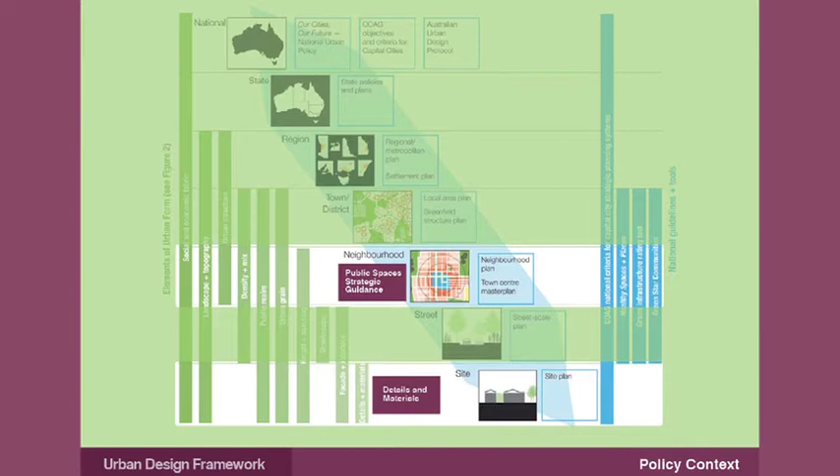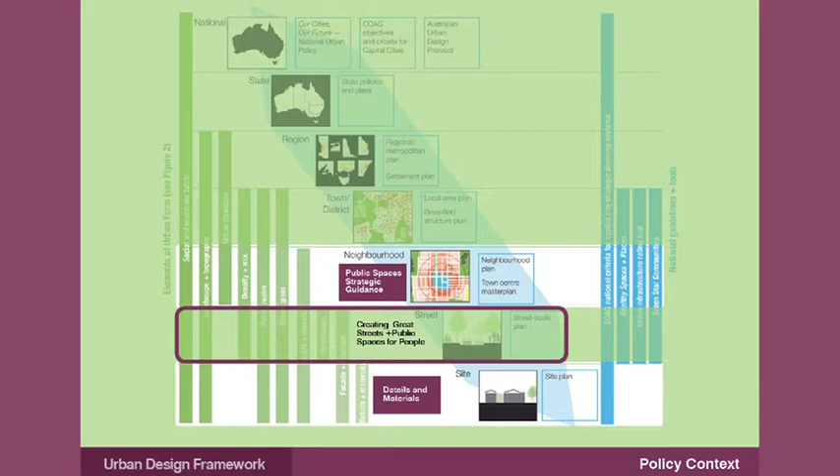What we're really saying about this project is we're having two parts to it. It's about setting a strategic vision for the future of the city and the streets, but then actually, how do we do it? So it's also about the details and materials, how we actually get long-term integrated change to occur to our streets and public spaces.

Council is also at the moment undertaking a placemaking strategy, engaging with the community and finding out what people want for their public spaces. So these two things work together so that we have a toolkit for the community to actually create the spaces that they want to have.

Just a bit of background of why we're doing it, and this starts to talk about a lot of the other sustainability factors we're looking at as well: there's just an excessive variety of elements and materials within the public realm of Adelaide. This is all of the seats that we've got, all of the spare parts, all of the things that we have to maintain and look after.

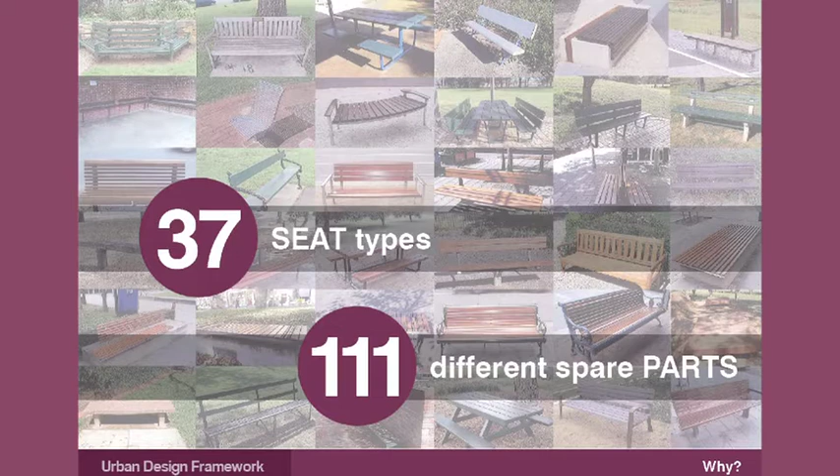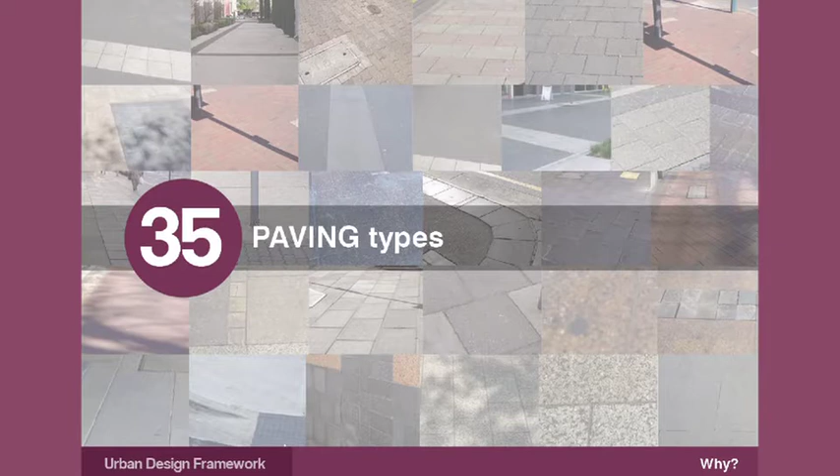So how do we make it easier for our depot and maintenance crews to actually repair and fix things? There's just all of the different types of bollards, all the different types of pavers. What does that mean for council in terms of sustainability, maintenance, long-term financial planning, procurement, all of those kinds of things, where we start to have inconsistent approaches to designing our public spaces?

It's always with the best intent, but if you've got 35 different types of paving, you've got to have 35 different types of stockpiles, 111 different piles of different parts. And what starts to happen is you start to have this erosion of the quality of the public realm.

So when a new bike rack wants to get put in, it's kind of like, oh, we'll put it in and we'll get the concrete to match, and we'll colour it and it'll look okay, and it just leads on to an erosion of the quality of the public spaces. And high quality public spaces attract people and make people want to use them, so we're just wanting to improve the quality.

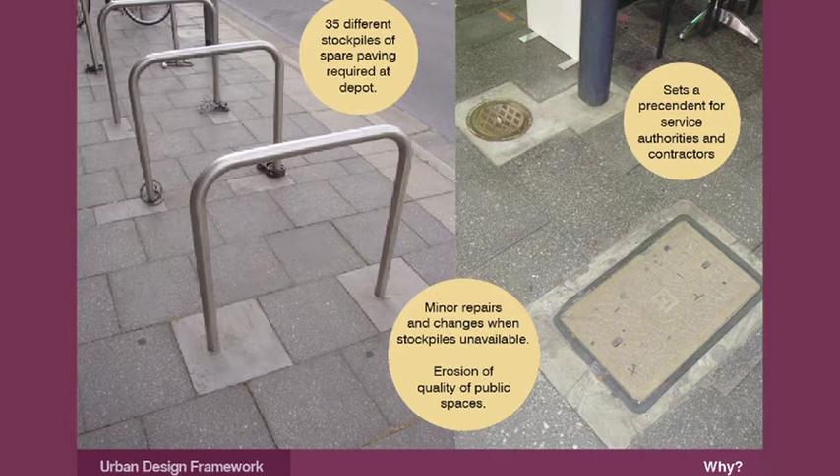There's a big risk aversion. So everything's about, oh, what if a car drove around that corner and took everyone out sitting there? It's kind of like, well, we should be looking at designing the spaces that actually calm traffic and create environments that give people shared responsibility.

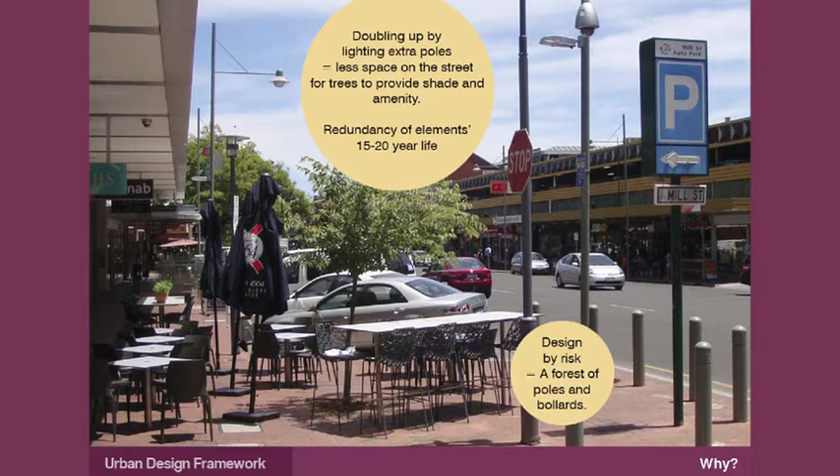So it just leads to these things where you have a set of bollards here, then a pole for your CCTV camera, then a pole for parking, and then another pole. So how do we start to consolidate all of these things and design places for people?

Elements are used inconsistently, so it's about the look and feel of the city as well. It's about Adelaide as a place that visitors come to. So how do we work on these things? And then we need to consider sustainability, including whole of life costs.

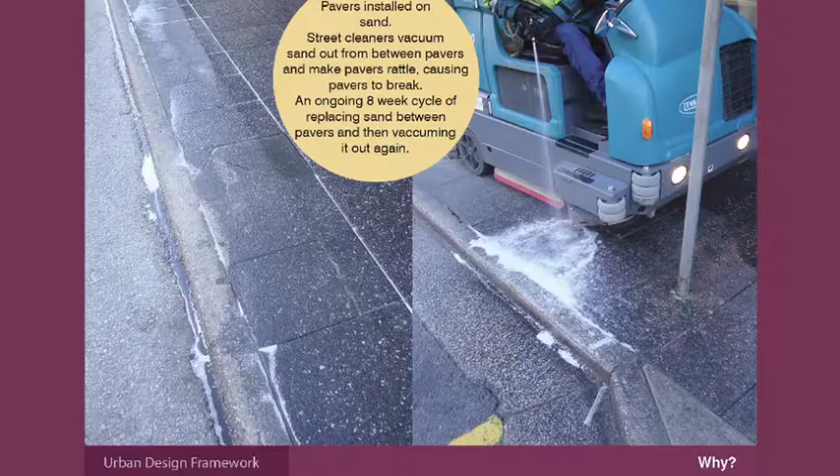This is an example of Hindley Street, one of the busiest streets in the city. Every Friday night, everyone goes out, has a good time. They have a few too many drinks, have a kebab and drop it on the ground. Then the depot's got to come and clean that up. Come Sunday or Monday morning, they're down there with street cleaners, scrubbing, getting all the detergent in there, blowing it into the pavers to clean everything out.

But we actually install them on a sand base. So what happens is through time, it's an 8-week cycle: they go down, scrub, blow out all the sand, the pavers start to rattle, people start tripping and falling over, and everyone goes 'what are you doing?' So then the masons come back and relay it all with sand to get it working right.

And then the cycle starts again. So how do we look at saying that in the long run, maybe we need to build something of a higher quality that takes those activities, so you're not having this ongoing maintenance occurring all the time.

We don't have a palette of materials or approaches for the parkland, so this comes down to equity - how do people, like a parent with a pram or a person with a mobility aid, actually interact with and enjoy the parkland? So it's about improving the quality of our spaces and how they work.

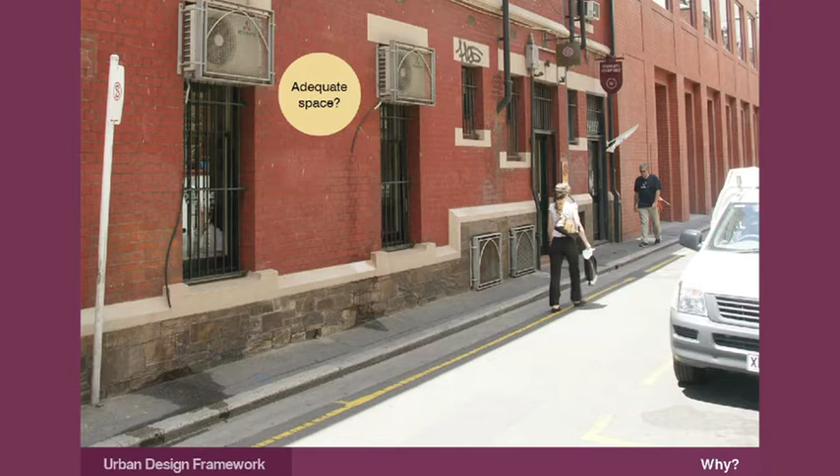And then we need to look at future-proofing the city. We know all of the work that Hassan's been talking about - how do we start to prepare for that in 20 years' time, when trees and all of those things take time to grow, and how do we get the right conditions for them to grow?

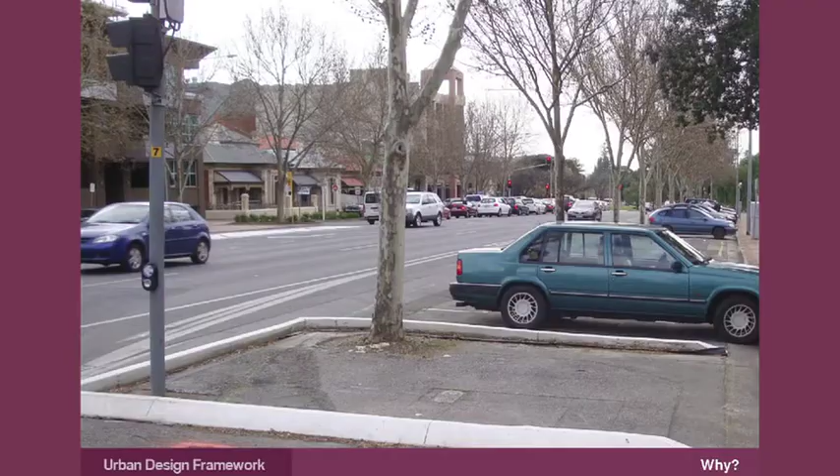So there's lots of things that occur at the moment, and there's lots of contested space in the public realm - it's almost like an iceberg. Once you cut the surface, underneath there's all the services, all the service authorities, and they have requirements saying you can't plant a tree here, you can't plant a tree there. How do we actually start to work with them to better get plants into the ground to provide long-term value for the city?

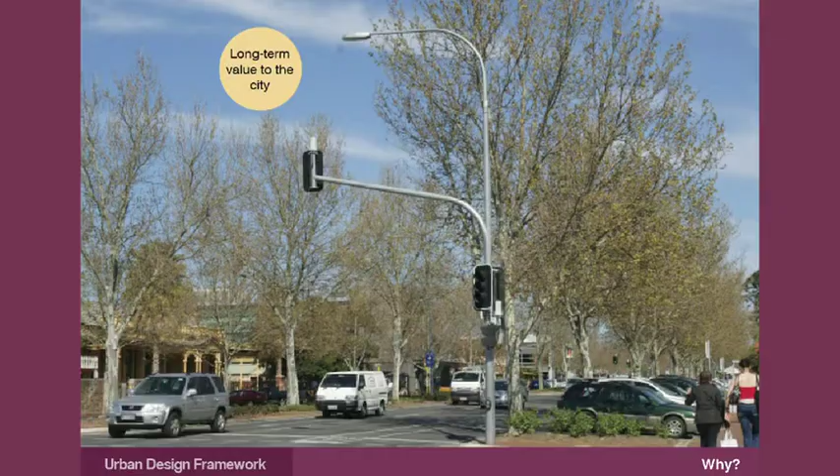This is the only asset class in the city that actually increases in value, where everything else depreciates. There's studies showing that in a street with trees, property prices go up, people use them more. So how do we start to transition our streets towards this?

Some of the objectives and components are really to have a strategic guide for the city - building on the strengths, confirming a clear and consistent approach to public spaces which incorporate urban design and sustainability principles, and providing a set of documents for developers and council officers.

So this is all about how council does things. Council has a lot of asset classes. Generally what occurs is if a footpath needs to be resurfaced, people come in and resurface the footpath, but then 3 years later the lighting might need to be replaced.

So they come and dig up all the footpath, trench it again, and put in the lighting. Then a few years later it's like, oh, we want to put trees in here. They dig it all up again and do it again. So how do we start to combine all of this stuff so we can actually have everything undertaken at the same time, considering everything at once?

So it's more an integrated approach. If we have consistent details, it becomes easier. It's kind of the toolkit you can use to build the city. We like to use the analogy that we're on the Monopoly board, but we always seem to hit jail and go back to the start. How do we collect our $200 and get past that?

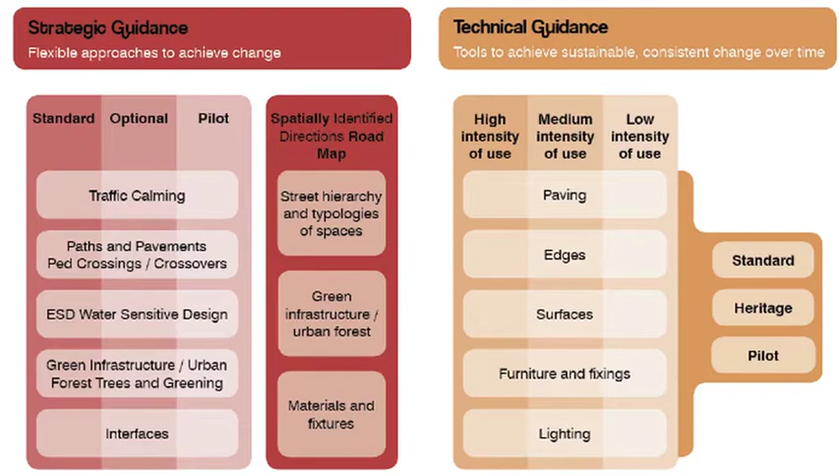And then the whole process fits into the process of renewal. Really this is a toolkit and a guide for us to work with the community to build the places that people want. They fit into the process of renewal with third parties, businesses, the public, other stakeholders. We have a bit of a plan for where we want to be in the future.

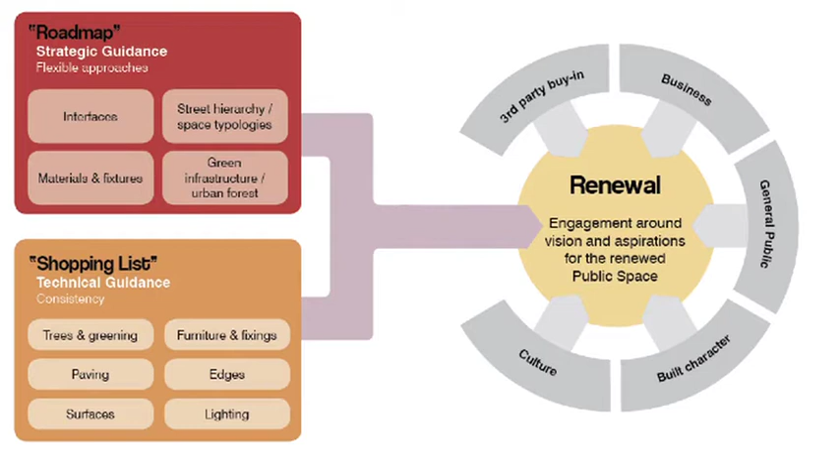As part of this presentation to council, we gave a few case studies of places where this has occurred before. Lyon in France was an example we provided, to really start the conversation that this is a long-term plan - a 30-year plan for how we improve the public spaces, doing it bit by bit to have a better city.

This process started in 1989 in Lyon, initiated by the government because they had lots of social inequality concerns and issues. Their key platform and strategy was saying that public space is common ground for everyone - so if you design good public spaces, it's going to help with all of these things.

So what they did was come up with a high-level plan. They had a green plan for greening the city, a blue plan for how they're going to deal with water and integrate it into the urban realm, a city plan, and a lighting plan as well. These were the strategic guides.

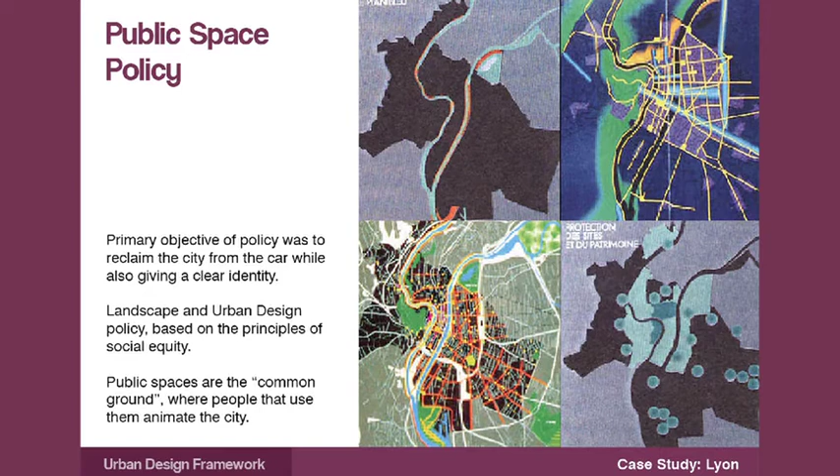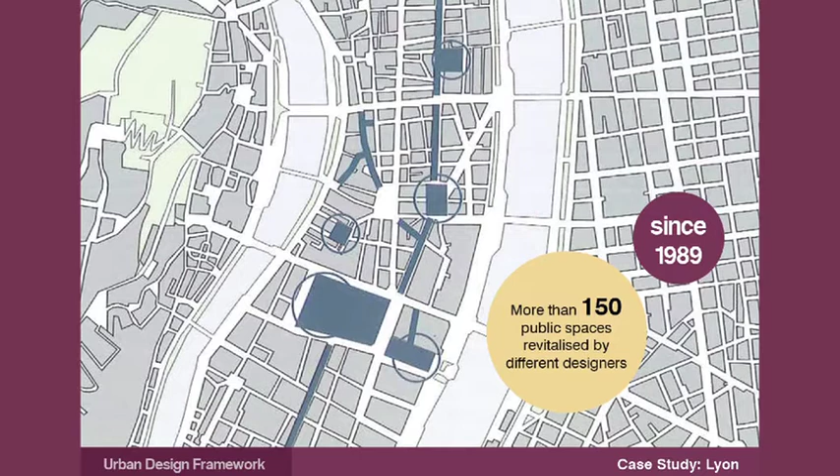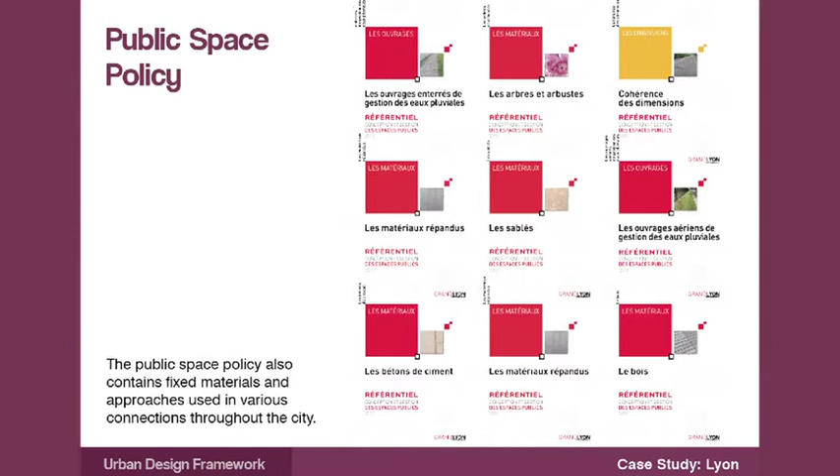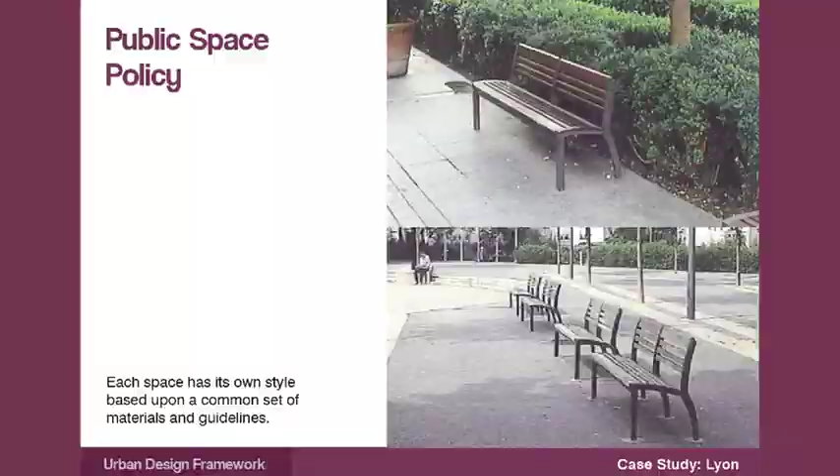Since 1989, there's been more than 150 public spaces undertaken and revitalised by different designers, landscape architects, urban designers, and artists. But what they had was a palette to work with - you could be creative and design these spaces, but using this kind of palette. All different permutations of spaces were created, but they used the same palette, which helped the local government and authority with maintaining and upkeeping it all.

This is one of the components of the urban design framework that we've had endorsed by council. So this is really what we're talking about: the streets of the city. Adelaide's blessed by having the parklands around there, but it's the streets that we're looking at that are the public spaces.

What we've undertaken is a classification of the streets based on the activities we know are scheduled to occur there and what's going to happen in the future. We've started to define different zones, different areas. This is where it all occurs in the city. But then there are going to be changes in the future, an increase in development, more urban living, inner city urban living. And then there are parts of the city that aren't really going to change much - they're heritage listed.

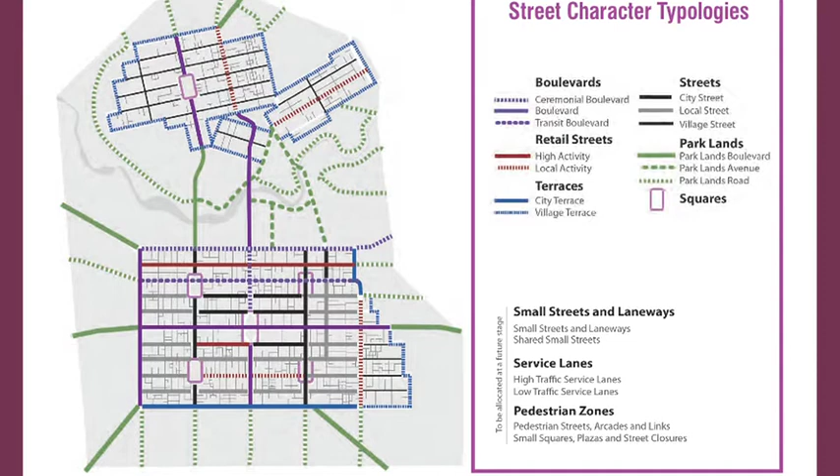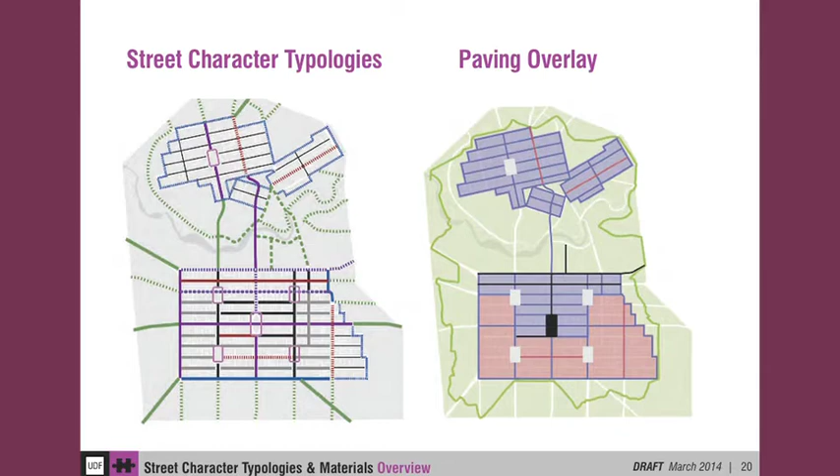So we've worked on providing an overlay to that. There are all these layers in the urban design framework, and one is a paving overlay. Previously there wasn't a palette of materials agreed upon by everyone for use in the city, and that's what led to the 35 different paving types. We've now been able to get council to agree on a range of materials.

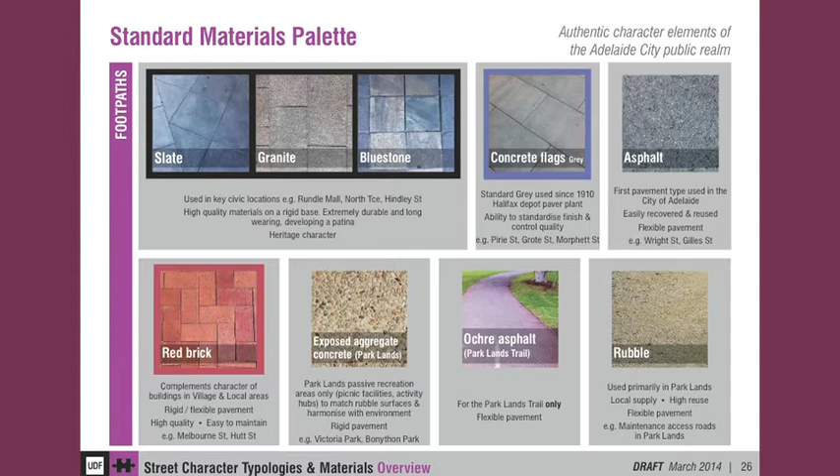The materials we've chosen, we've been careful to make sure they all have the ability to be sourced locally. We're looking at using Mintaro slate from the Mintaro quarries for the really prestige, high quality streets, granite, which was used on North Terrace and quarried from a granite quarry out in Outback SA, and Kanmantoo bluestone - all locally sourced materials. We're also using red brick, a lot of which are Littlehampton pavers from the Littlehampton quarry, and then concrete flags.

We've made a specific decision to go with the light grey concrete flags we use at the moment, because of the urban heat island effect and absorption of heat through darker surfaces. We're using asphalt as well, a very recyclable material, easy to reuse and recycle. And we've looked at using rubble and other materials for the parklands.

At the same time, we've said there's a standard we'll use, but we know things will change in the future. How do we know, and have a process to be able to evaluate materials we want to use in the future that we know we're going to need? And how do we assess them properly?

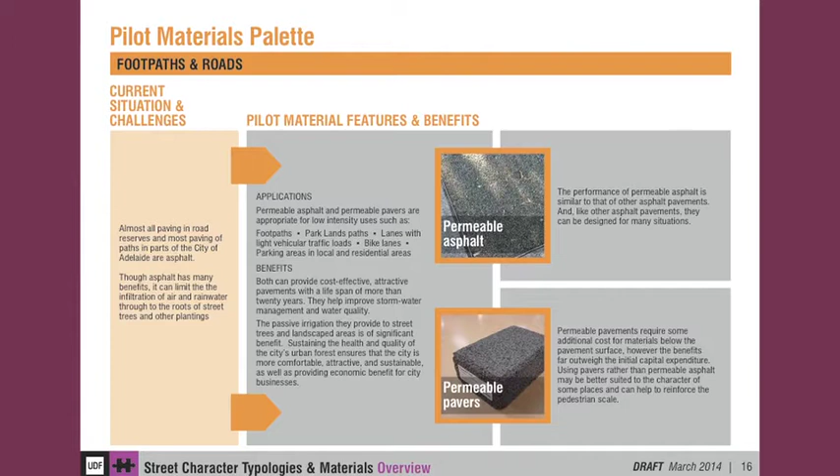These are a couple of the key ones we really want to start using: permeable pavers and permeable asphalt in our footpaths. How do we get water back into our streets rather than down gutters and pipes and out to Gulf St Vincent? These are some of the first things we're going to trial - permeable asphalt in some areas where you don't get high frequency of vehicles, maybe in some of our parking bays. In streets where there are trees, we'll get the water into the ground to irrigate the trees. And we're looking at permeable pavers as well.

That's backed up by a process where we trial it and do a proper holistic assessment. What are the issues with procurement? Where does it come from? How are we going to build it? What's the construction methodology? What are the maintenance requirements - going back to Hindley Street, is it going to be easy to maintain? And then what's the disposal of it?

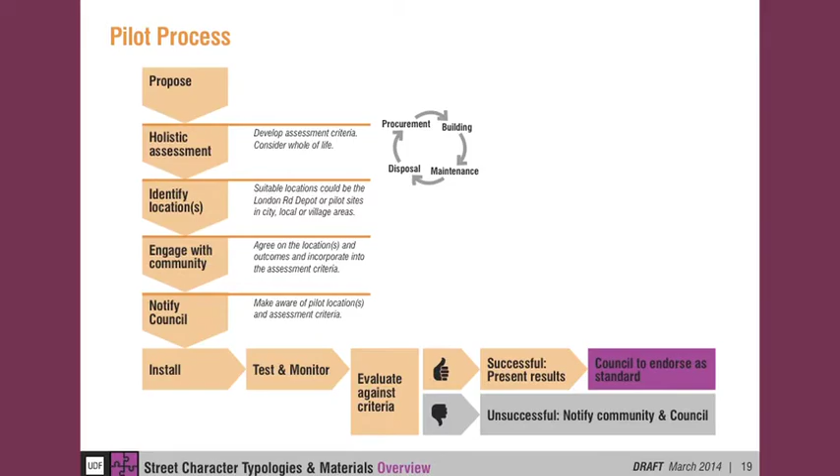Then we'll identify suitable locations for it, engage with the community saying this is what we're looking to do - what do you think about it, what do you think criteria should be assessed as well. Go and notify council, install it, test it and monitor it, then evaluate it against the criteria so we actually know what we're wanting to measure and get out of it. If it's successful, we'll put it up to council to be endorsed as a standard. If it's not, it's back to the drawing board - we'll keep trying.

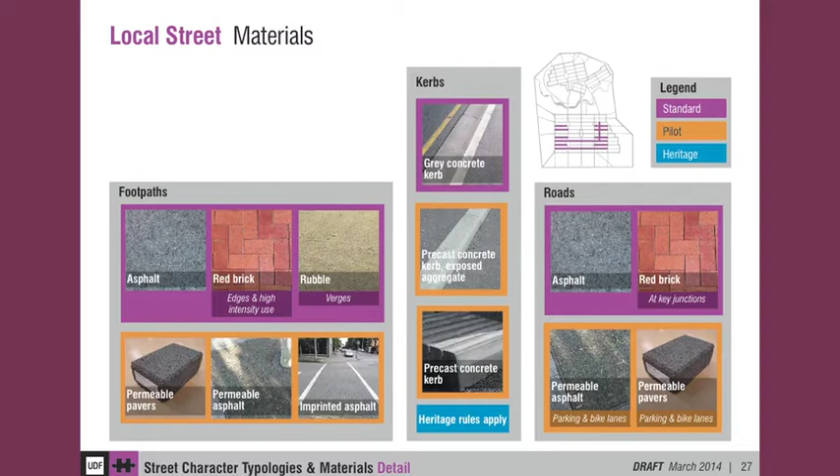And then what we've done is we've started to specify materials for streets. So all of the different types of streets that we had before, we've started to identify a palette for each of those types of streets. You can start to see here that we're wanting to look at using permeable pavements, certain types of paving. And these all relate to the character of Adelaide as well, reflecting the built character of the city. There's lots of red brick in the buildings, lots of slate.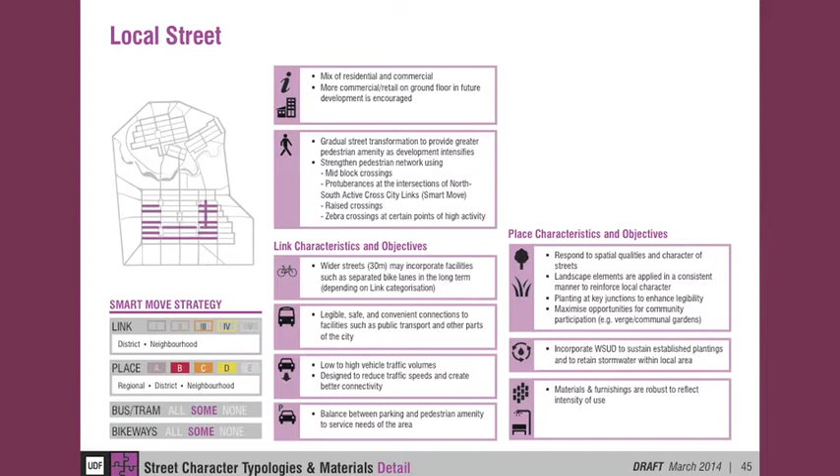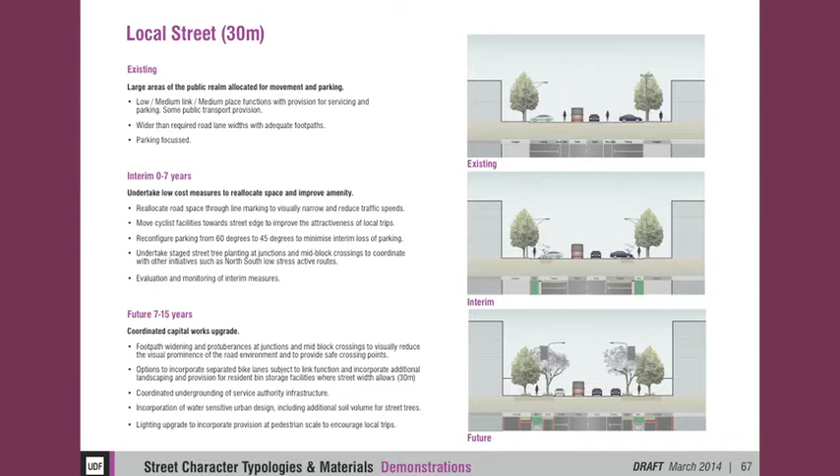So it's really building on the character as well. And then we've started to define what are some of the key characteristics of some of the streets. And what we've actually provided as well is demonstrations. So we're not saying this is what the street will be in the future, but the process we've been through is communicating to say that we can't go and do all of this at once. How do we actually do things in a staged manner so that we actually set up the street for these things to occur in the future?

So, you know, if this was a 30 metre street in the city, this is kind of what occurs at the moment. There's lots of angle parking, really wide traffic lanes. We've got massive, big wide streets here. What do we do in the interim that's not going to cost too much money, and that we can trial and test with the community?

So, in this example, we're saying, well, maybe what we could do is change the street to 45-degree angle parking, and you only lose a few car parking spaces. But while we're doing that, let's see if we can put the bike lane up against the footpath so that you start to protect cyclists and make it easier for them to use. Where you've lost a few of those car parks, there's probably opportunity to put some trees in. Let's do that and set up the street for the future.

And then in the future, when we've got the money, we've done all the work coordinating with all the service authorities and all of those kinds of things, that's when you can go in and do a reconstruction of the street. Start putting in permeable surfaces, providing all the root volume for the trees to grow and sustain themselves. And then showing some indicative examples of what those streets could look like in the future.

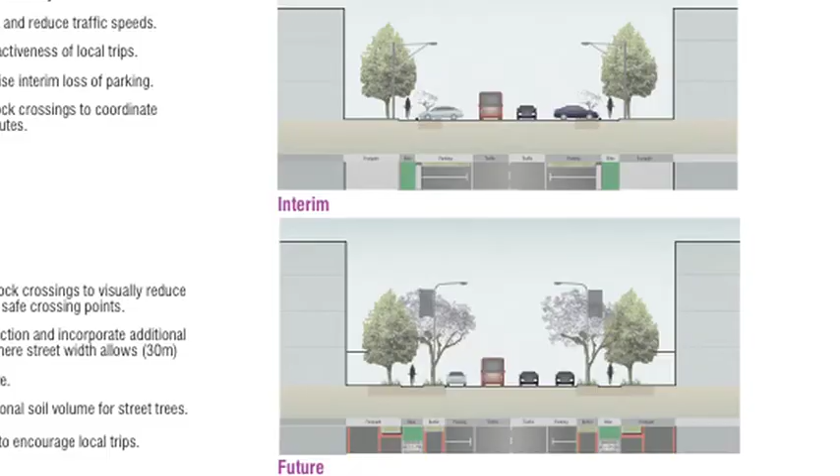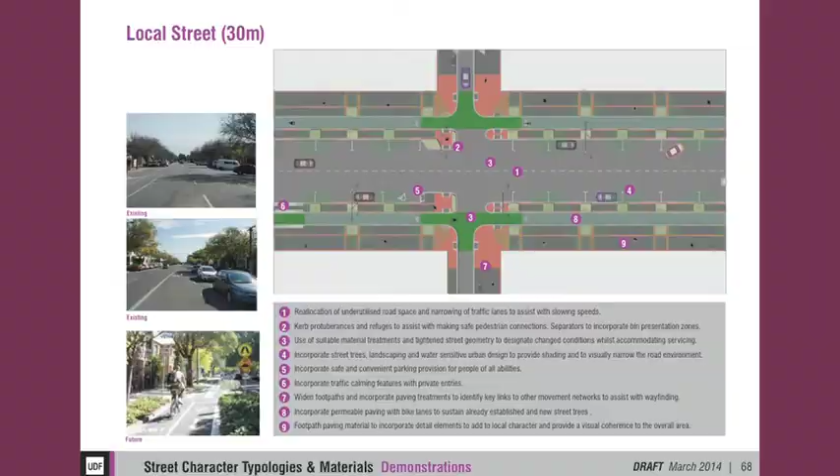So starting to say that you'd have footpaths, you could have a bike lane, because that bike lane no longer has to take heavy vehicles, well, that could have a permeable pavement. So you're kind of saving money for council, but then all the stormwater that comes off the streets, it's going to go straight down and water the trees.

And then I just thought I'd bring this along as well. This is a component of the UDF that's been developed, and it's kind of out to consultation with key advisory groups at the moment. So that's with the Australian Institute of Landscape Architects, TreeNet, the Arboricultural Society, and I guess this is part of one of our toolkits of looking at how we kind of approach the public realm in the future.

So this is really designed in a way that it's easy for everyone to understand, and there's a whole range of approaches that you can use. It deals with public spaces, but it also deals with buildings as well, which we can run through.

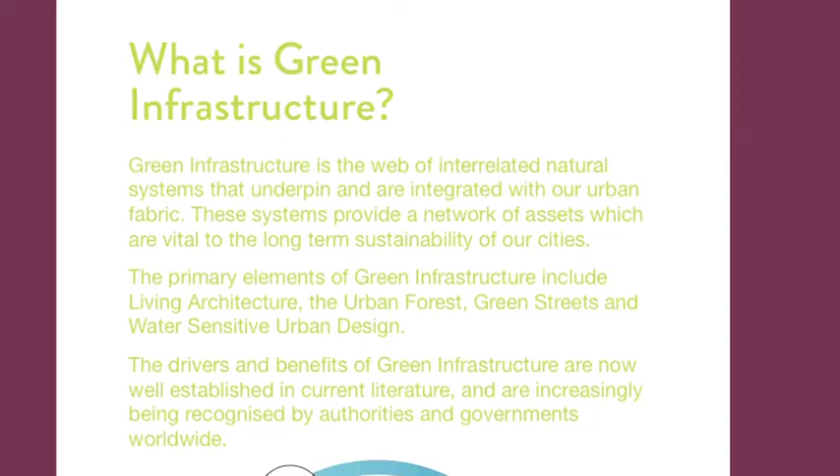There's a purpose to it, but what is green infrastructure? What we're saying is it's an interrelated web of services that kind of service the public realm. So it's a whole range of things, from green streets to living architecture, which is called living walls, green roofs, green streets, water sensitive urban design, the urban forest, and urban food as well.

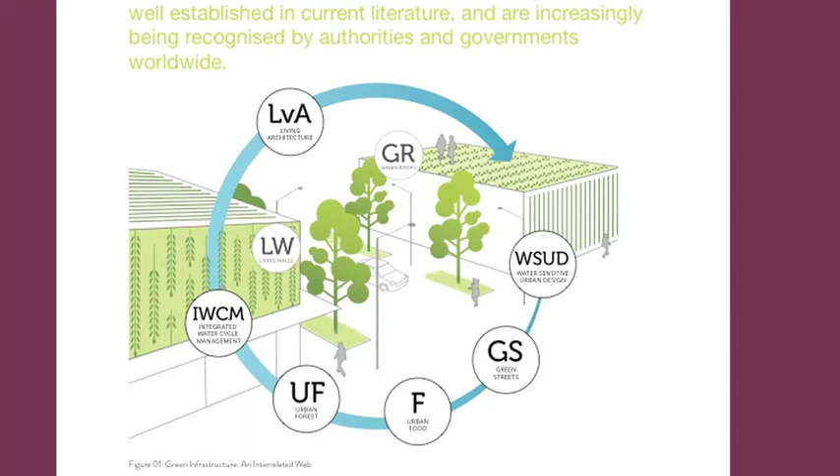There's a vision for the city streets, and we've developed some principles. One of the key principles is that green infrastructure starts to become at the start of thinking whenever we do anything. Traditionally, with green infrastructure and planning, it's always the nice to have, or it's like, oh, we haven't got much money for that, so we won't do much. What we're saying is it's got to be at the core of what we do if we want to make our cities livable in the future. This is the way we've got to start thinking and recognising the benefits of it.

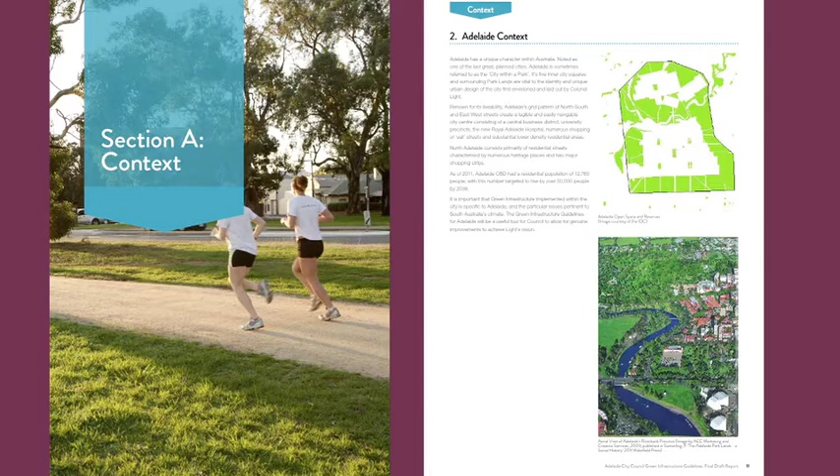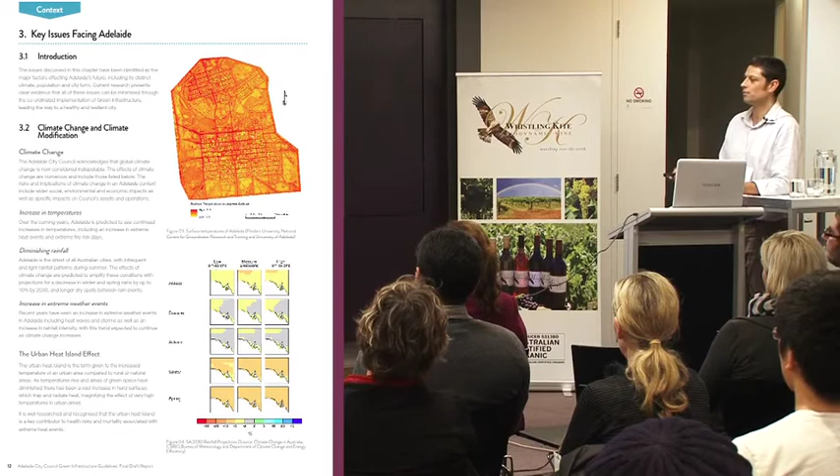Looking at the rainfall, diminishing rainfall, and climate change. Existing city form, lots of urban canyons, and this is kind of restricted at the moment by all of the services that fit under the street. And then big wide streets covered with lots of asphalt, lots of heat absorbing surfaces.

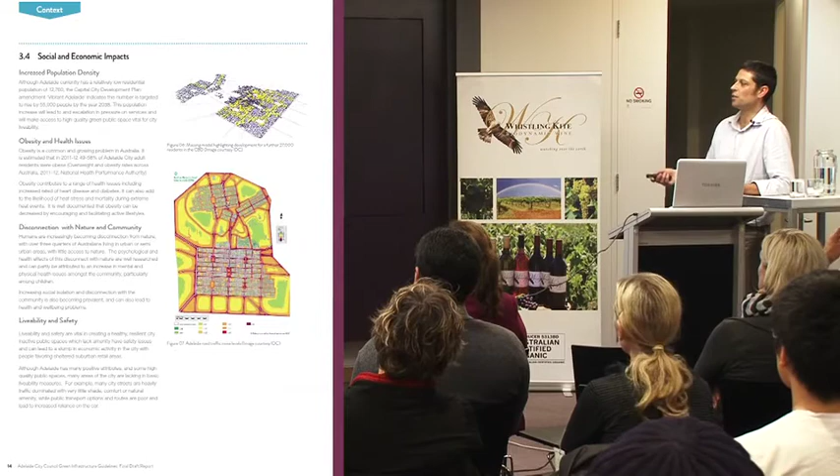Social and economic impacts - these are noise maps showing where the greatest amount of noise is generated in the city, related to livability and safety. A lot of this work is informed by an evidence base undertaken by the Botanic Gardens of South Australia, who just last week released a website with a whole evidence base of green infrastructure and its benefits. This has really informed a lot of the work we've been doing.

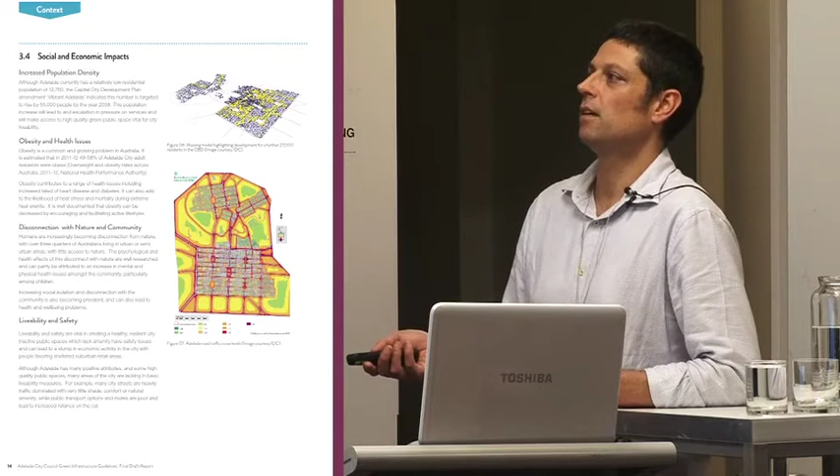Ecological change, soils, context of the city. We've started to identify the benefits of green infrastructure: improved water management, health and well-being, increased livability, attractiveness of the city, and climate modification, so it can assist with cooling the city. It also has economic and ecological benefits as well.

So how do we connect the parklands into the city? We've also looked at the range of scales that it operates at, going right from the regional scale down to the city, the district, the neighbourhood, down to your backyard. There's a whole range of different approaches you can use for it, and every bit counts.

We've always been talking about this cost-benefit analysis. So something might cost a little bit more upfront to do, but in the long term it's going to provide added value.

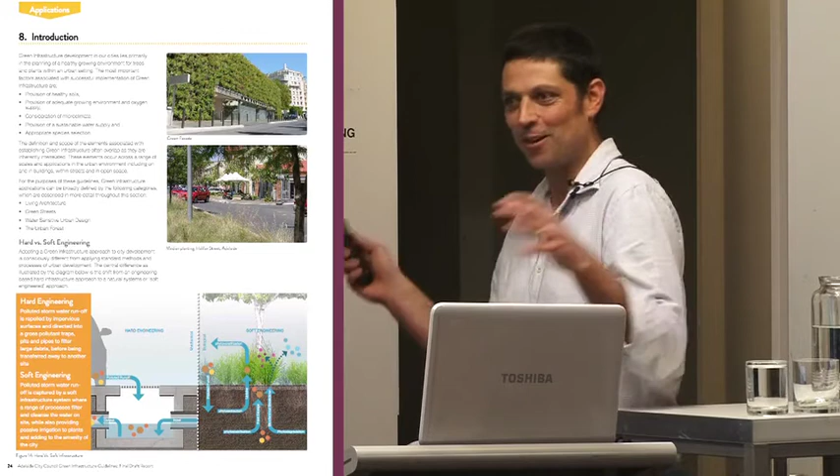We've started to provide some information about all of the applications. One of the key things we've always been reinforcing is transitioning from a hard engineered approach to a more natural approach. Rather than putting everything into a pit and a pipe and getting it away as quick as possible, it's about keeping it on site and retaining it as much as possible.

We've started to look at living architecture - everything from green walls, green roofs, all of those kinds of things. What we've tried to do is provide information for developers so they can start to make decisions about using some of these things when they come into council with a development application.

Green streets - defining what some of the key things about them are, and starting to talk about what we need to look at. You've got to provide the right amount of soil for trees to grow in an urbanised environment, and these are some of the methods now being used.

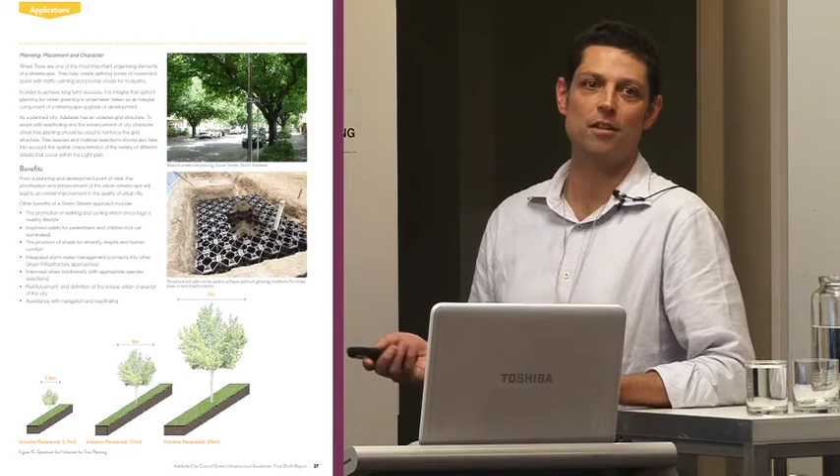This is Victoria Square, in the centre island, where all of those gum trees have been planted. There are structural cells underneath that provide enough room for the roots to grow. If we didn't do that, the road engineers would have said you've got to have this compacted to a certain depth and rolled over five times, and there wouldn't be anywhere for the roots of the trees to grow. So we've put them in to allow the trees to get to a decent size.

Water sensitive urban design - what does it mean, and how can you put it into an urban environment? The urban forest - looking at a more strategic approach rather than a reactive approach.

And then urban food - this is one of the big things working with the community that we know people want to do. Our placemaking team are out asking people what they want to do in their street, and it's about having a conversation with everyone. If you do want to plant in your street, we want this to occur, but we need to talk about maintenance, management, and all of those kinds of things. Let's have a conversation about it, discuss it, and come to an agreement, so we get the best benefit for everyone.

This is down on Whitmore Square - a verge garden where our community development team and placemaking team worked with the local community to create some pop-up veggie patches.

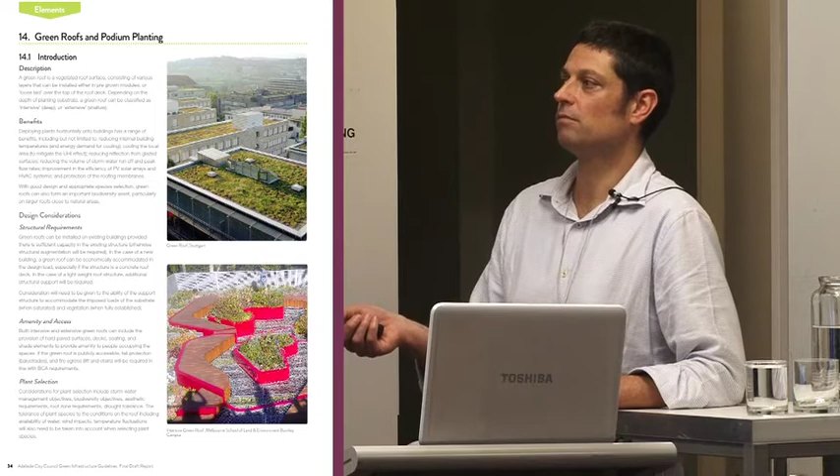And then we've started to define the elements. What are each of the elements of living architecture? So we've gone through and looked at green roofs and podium planting, and we've really provided high-level advice and descriptions on what they are, the benefits, and then the design considerations.

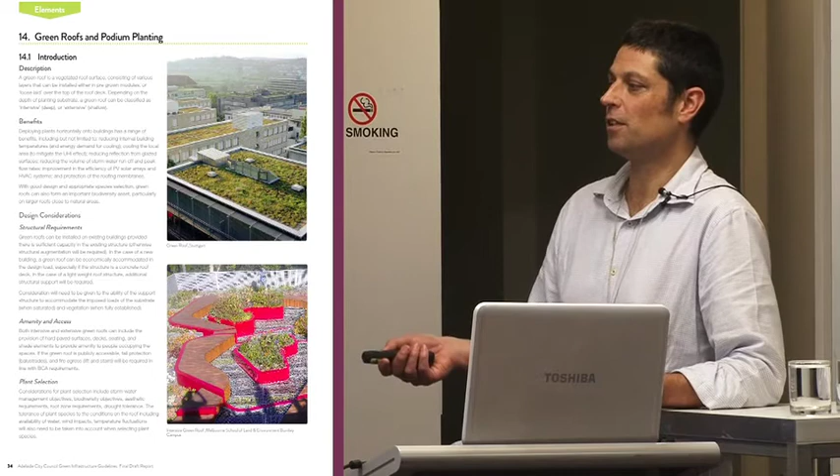So when we're talking with a developer saying, well, this is what you've got to start to think about: structural requirements for roofs, access, plant selection, starting to identify if you want to have trees on a rooftop, you're going to need to provide this amount of soil. But if you're wanting an extensive green roof, you don't need as much soil, so they can start making decisions.

And then going into a bit more detail, saying these are the different types of approaches that you can use, and these are the things that you need to think about. So there's a bit of a toolkit of different things that can be looked at. More intensive green roofs, if you're wanting to put some trees in there, you're going to need to have the structural capacity to look after it and hold the soil.

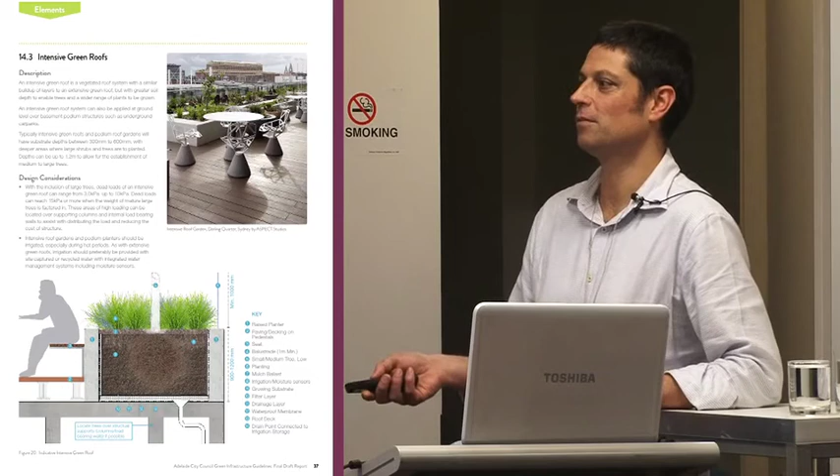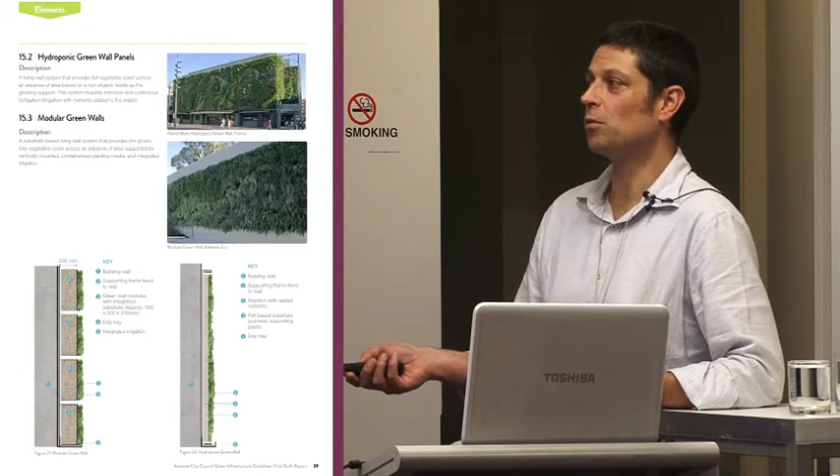Green walls, this is a great image of the zoo. There's different types - there's hydroponic green walls, there's green facades that can be used, hybrid green facades. This is the one that Graham Hopkins designed that's down on Bentham Street.

Climbers on cables - it's a great thing about Adelaide, everywhere you go around there's lots of verandas and balconies with vines on them. It's really part of the character of Adelaide, we should be trying to reinforce this. Climbers on walls, climbers on verandas and arbours. So how do we start to get some of these things occurring?

And then we started looking at open space tree planting as well. So this is more for parklands areas, amenity trees, what are some of the requirements? Revegetation and biodiversity planting - starting to identify that council has a seed bank in its depot. So if anyone's doing work in the parklands, you should really use the seed that we've got that's of local provenance, don't go to a tree farm out in Victoria or New South Wales. It's about starting to get more upfront thinking and planning in place.

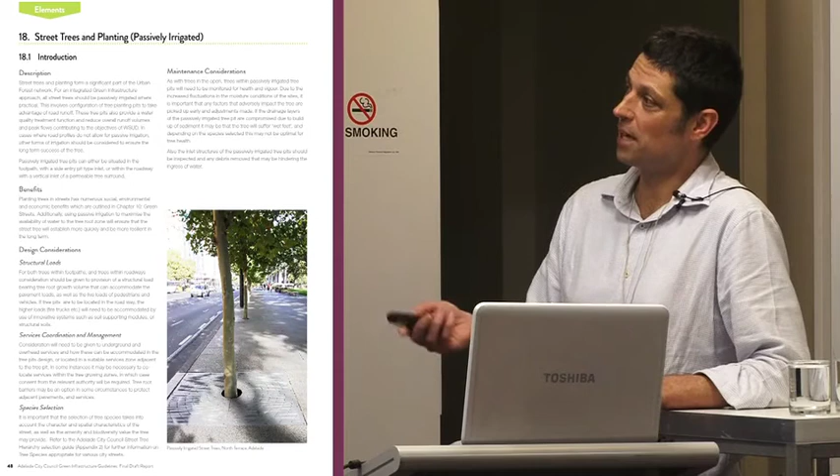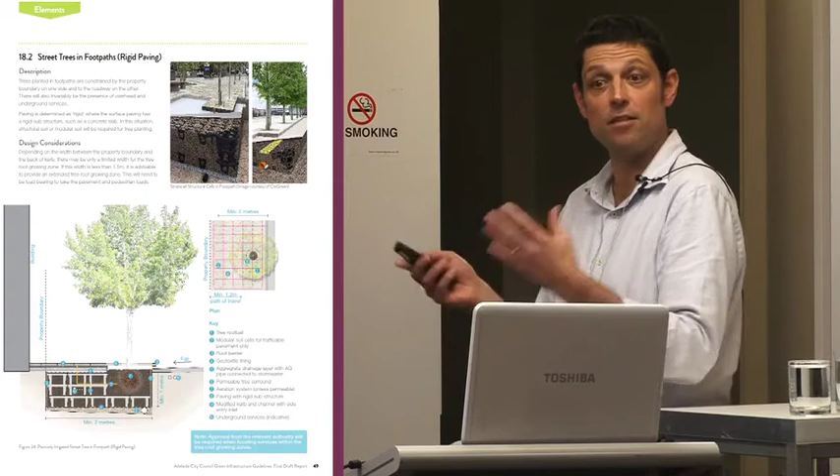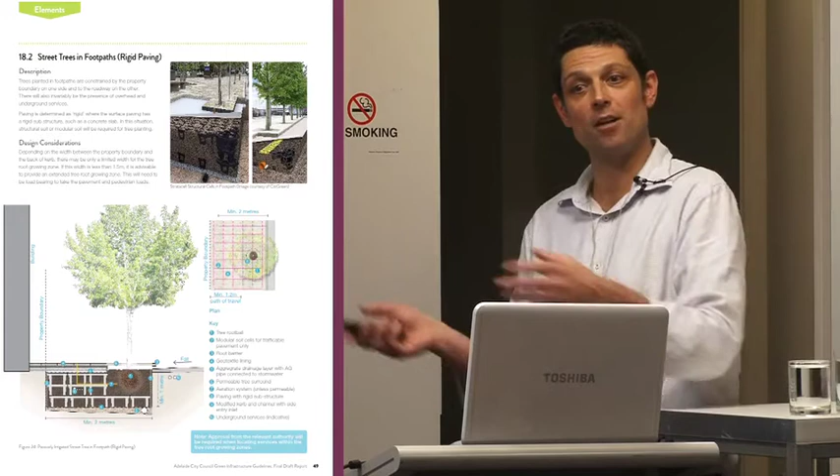And then we started looking at water sensitive urban design - street tree planting, but passively irrigated. This is North Terrace. Starting to identify details if we're wanting to put trees, these are going to be the minimum sizes, the minimum spaces that you're going to need to have soil with. And this helps us also negotiate with developers when someone's going and doing a new building and they're going to have to remove a few trees to get all their kind of plant in there or whatever. It's at least saying, well, look, this is the standard that we have and this is what we do, this is what you're going to have to do if you're wanting to plant trees in the footpath.

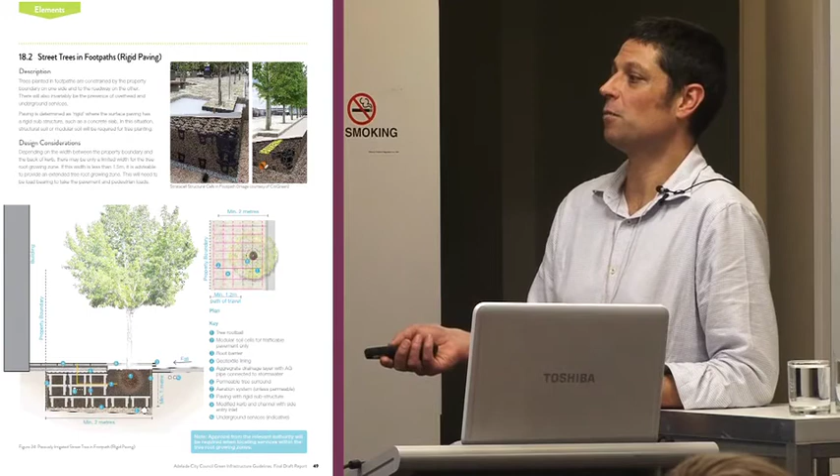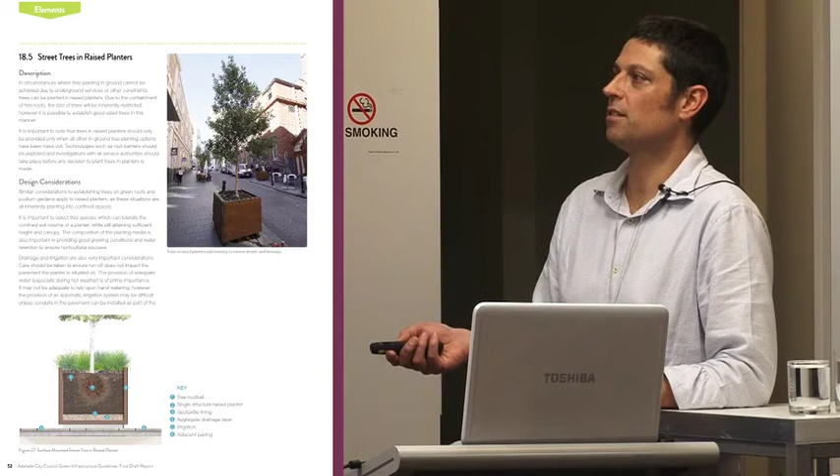So different types of paving in roadways - how do we get the right conditions in there for the structural loads? Street trees in planters in some locations, understory planting, permeable pavements. So how do we actually have the right pavements to allow water to come in and irrigate trees and planting?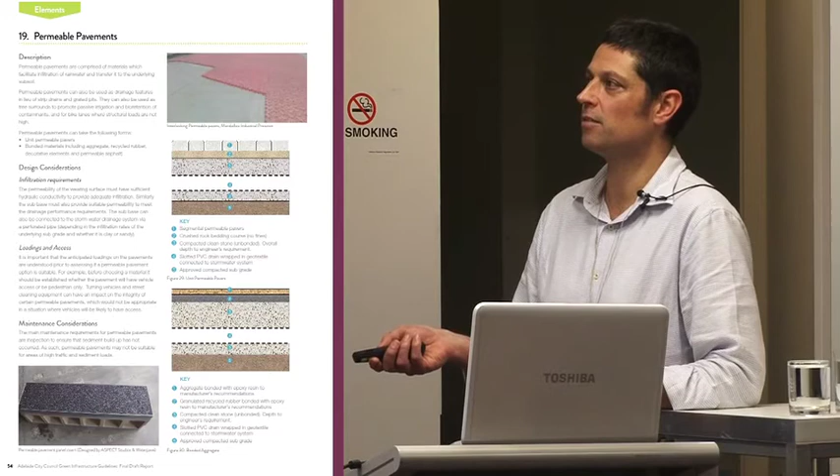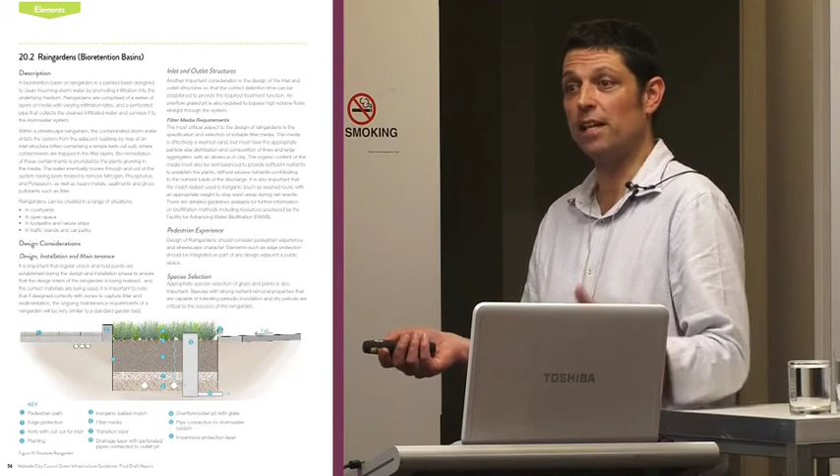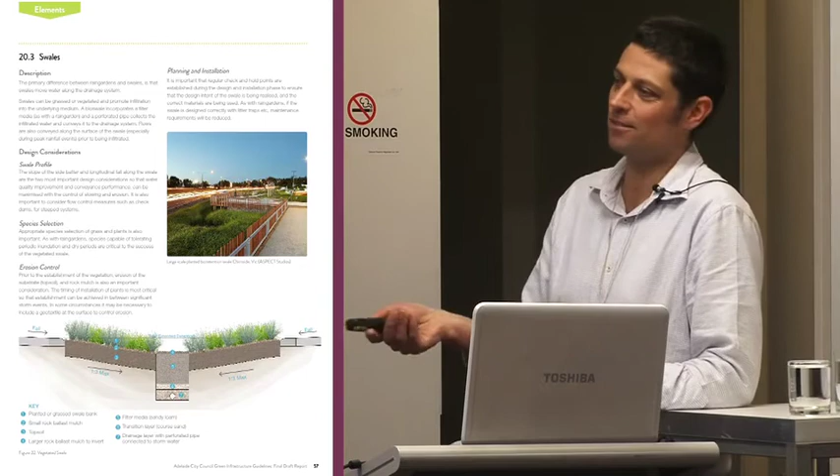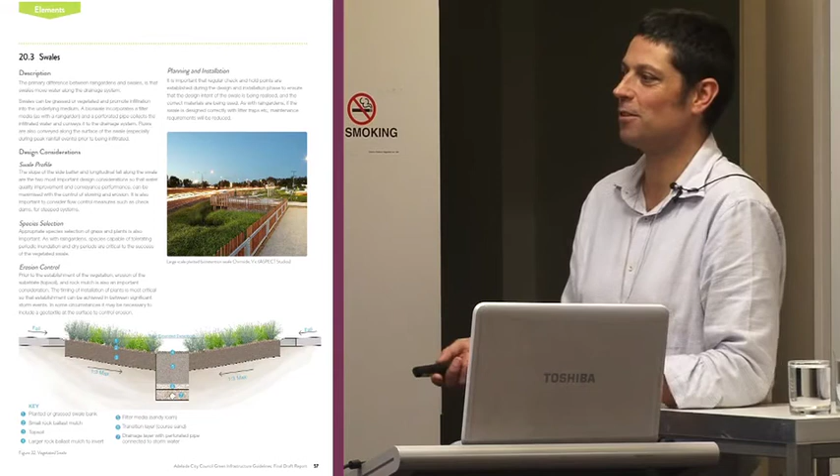And then water filtration and treatment systems - some of the things like rain gardens that we can use on extensions to curbs when we build out our footpaths. Swales, how can we use them? You go into the parklands and there's a car park in there, but it's all surrounded by bollards. Maybe we should get rid of the bollards and have swales around the edge that let all the stormwater run off. They provide a bit of an obstruction for people who might want to drive onto the parklands - it serves another benefit.

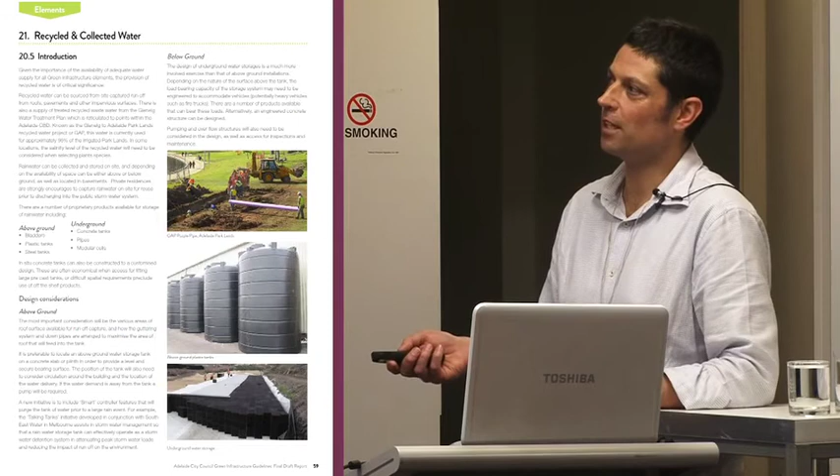Constructed wetlands, this is down at the Botanic Gardens. So just starting to show that you can do these things as well in an urban environment. Recycled and collected water. Water infiltration systems - so how do we actually detain water on site? The potential to have reservoirs underneath the roads.

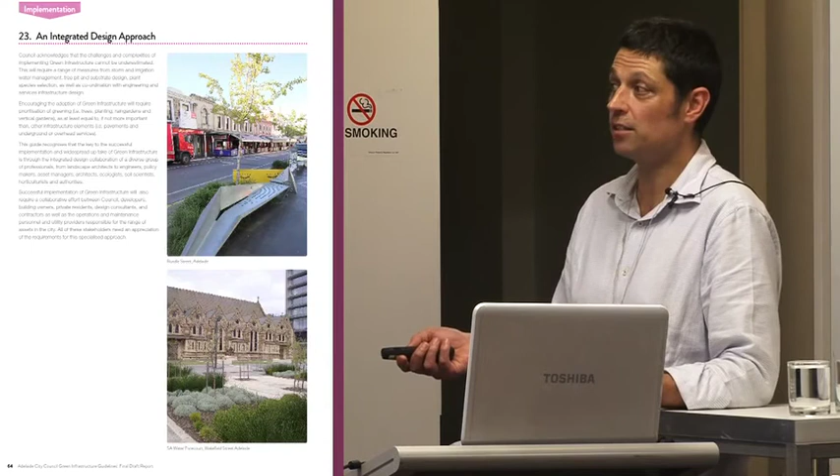Aquifer recharge. And then we started to look at implementation, so having a more integrated approach to how we do things. And then starting to look at what are the things that we need to investigate as a council in the future. What are the policy levers that we can put in place? So actually saying, do we have a ratings tool, or do we give a rates rebate, or all of those kind of things. How do we actually start to make this occur?

And they provided some information on some of this - City of Moreland in Victoria. They've got a kind of a rating tool for how they implement green infrastructure.

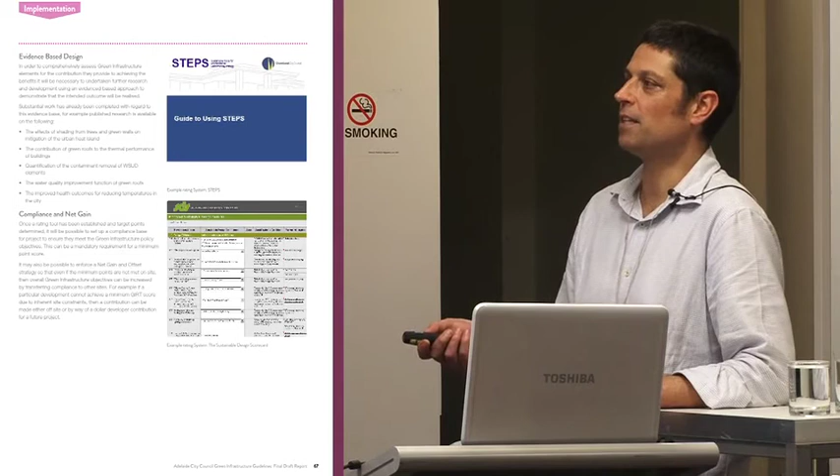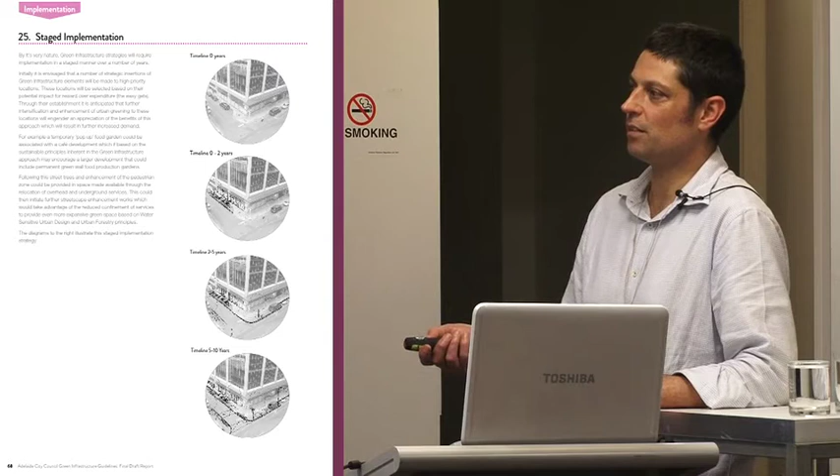And this was some of the visualisations that we provided to council, saying this needs to occur in a staged manner, that you have all the consistent details and then start to build the street. This is Pirie Street down near Wyatt Street. In the future, we could have these streets that are green, with a lot more space for people, and safer for people to use as well.

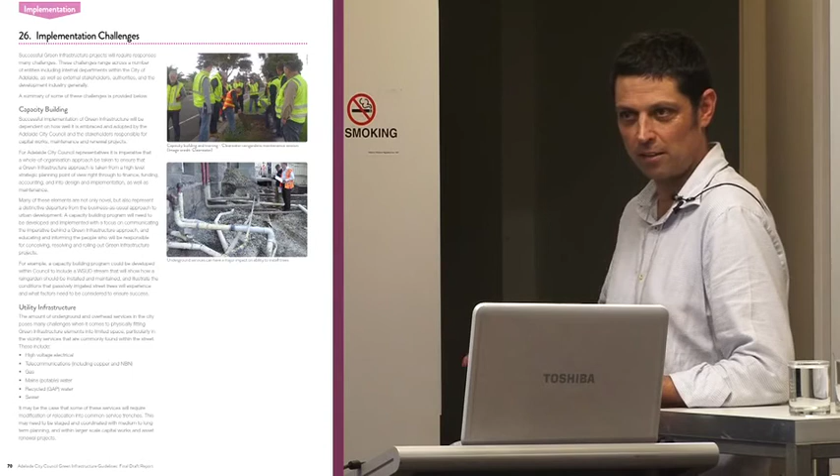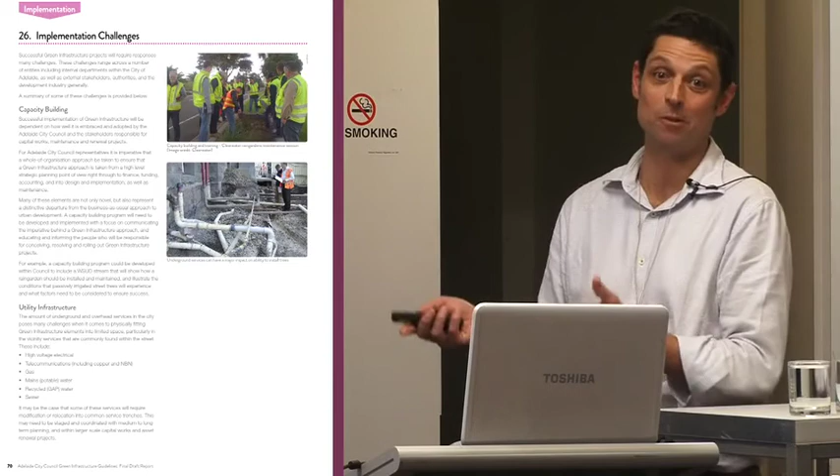And then some of the implementation challenges. These are some of the key things we've got to deal with, but what this project has done for us is allowed us to start having discussions with all of the service authorities. There's lots of legislation in place. What happens now with the Telecommunications Act is that if someone wants to put in a fibre optic cable, they can just horizontally bore underneath all the trees in a street, put in their fibre optic cable, and then when the trees die, we're not allowed to do anything because we're on top of a fibre optic cable. So how do we start having these discussions with the service authorities to say, this is what we're wanting to do in the future, how can we allocate the space for you to do these things?

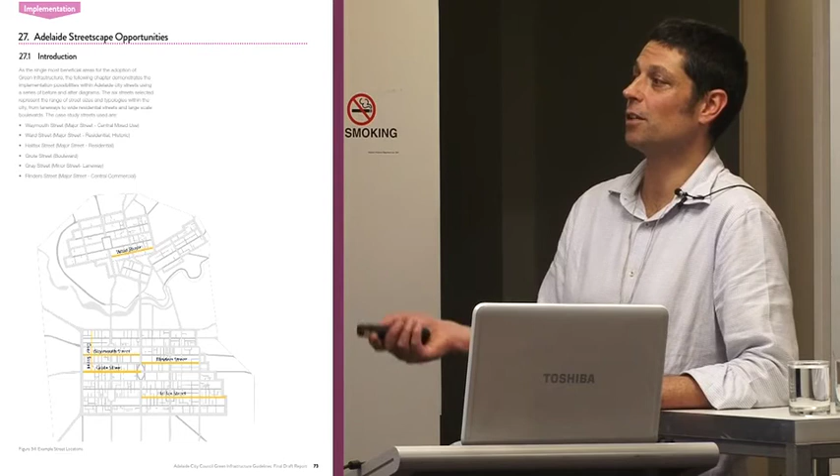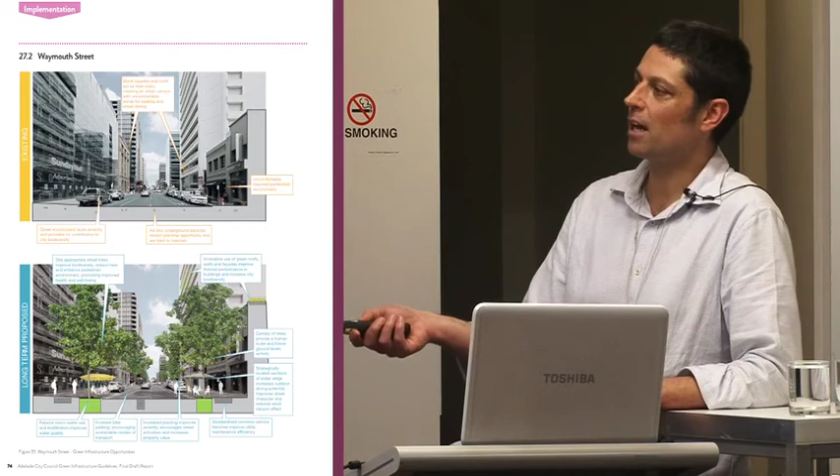And what we started to provide was some opportunities for what could be in the future. Looking at Waymouth Street, you can see all of the services riddled everywhere. How do we work towards, and it takes a long time, having a common service trench in the middle of the road where everyone's services go, and we actually provide enough room for all the soil for the trees to grow? Or are there green roofs on these buildings, or green walls? What's the best approach?

And this is Halifax Street, huge wide streets, lots of space, heaps of grass that's already there. Some of the approaches here are really good opportunities to just break some inlets into the curbs, let all the stormwater that's going down towards the parklands go into these areas and infiltrate, and plant some more trees.

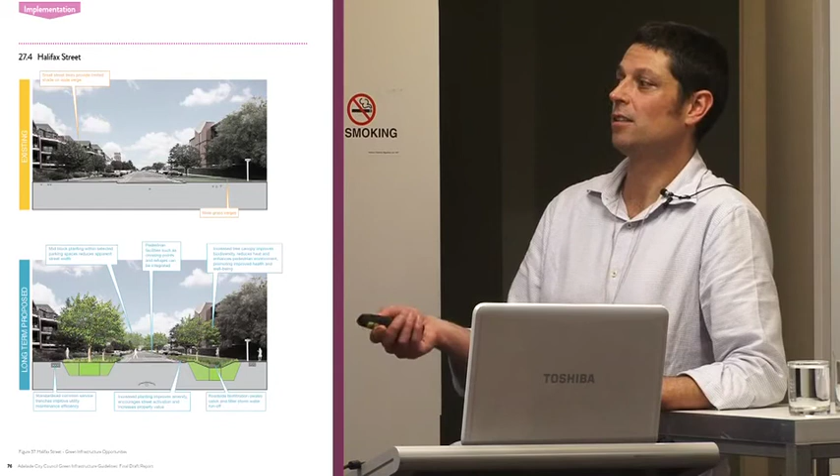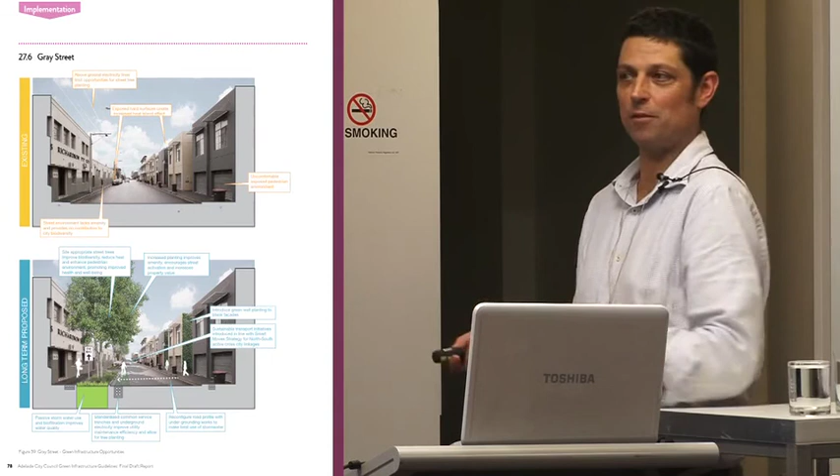And then some of the smaller streets in the future. When development occurs, people will need to come in and upgrade their services. If we have some of these plans in place, we can say, no, this street in the future is going to have trees down here. You can't just go and upgrade your high voltage power through here. You're going to have to put it over here so we've got the space to plant the trees in the future.

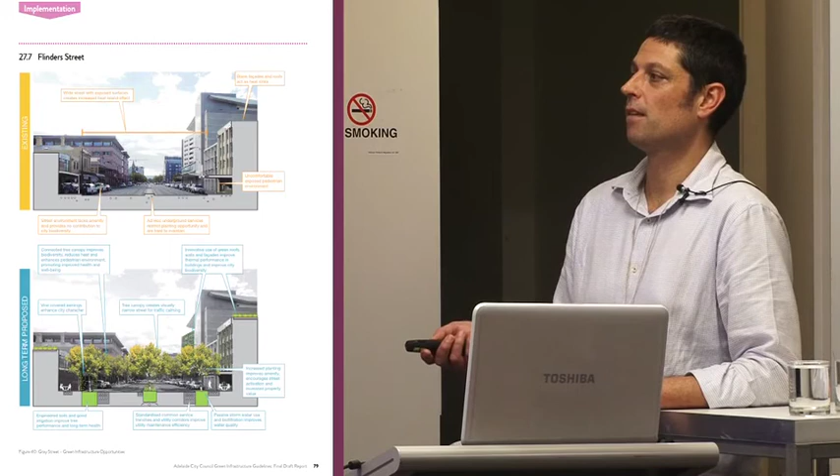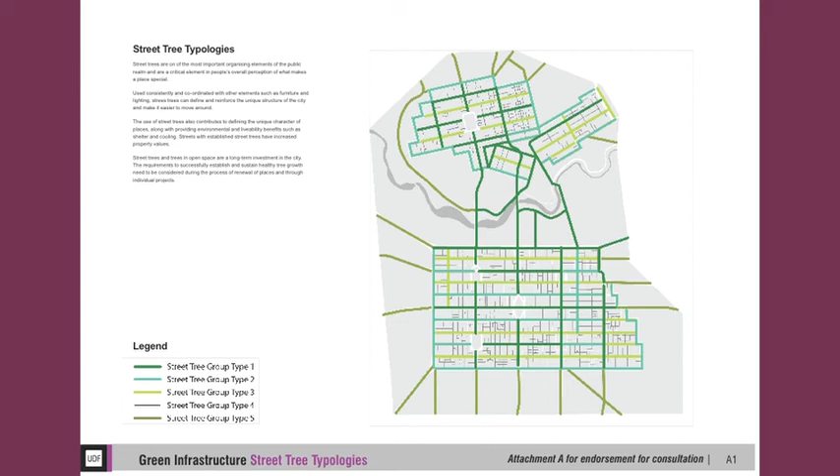That's Flinders Street as well. So how do we transition? At the same time, what we've actually undertaken is the development of tree typologies, saying these are all the different types of streets. The trees we'll use will be based on the characteristics of the street. So if there's a 40 metre wide street, we're going to put in bigger trees because they'll respond better to the built environment, there's more space for them to grow. And what we've actually developed is principles for how we do it.